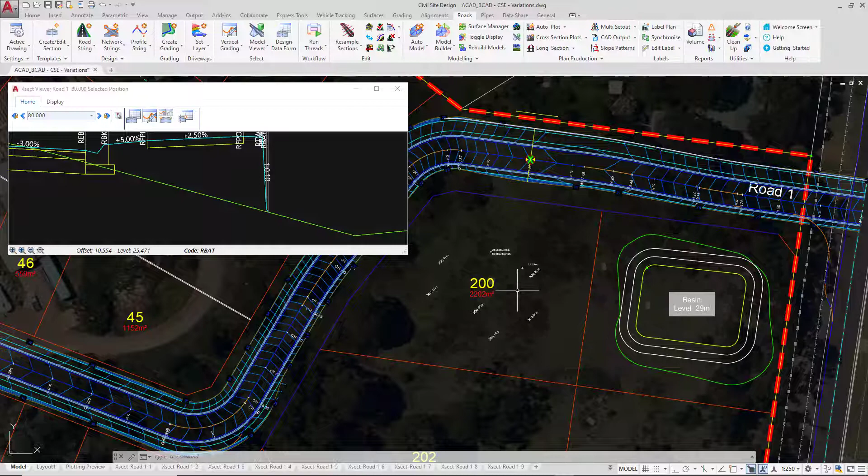Our next variation is going to allow us to use the power of an alignment to position a code. We're going to zoom in to the second corner, second bend of road 1, which includes chainage 190. We're going to get our cross-section window showing chainage 190. And we're just going to zoom out a little bit, just using the mouse, so we can see the content of the cross-section window.

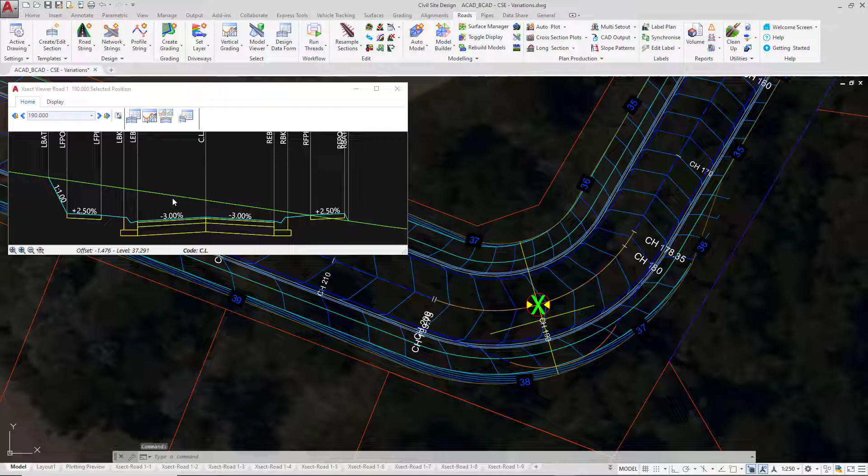You may be able to see there is an alignment which we have pre-drawn for you to indicate where the left edge of bitumen should be positioned within the drawing. To have the software use this particular alignment, we have to go and create a variation. In the cross-section window, it would be helpful to see this alignment. Now, this is a procedure which you should try and undertake as often as possible to graphically display an alignment within this window. We're going to go to the Display tab. In there, we're going to go to the following button, which is Show Other Objects.

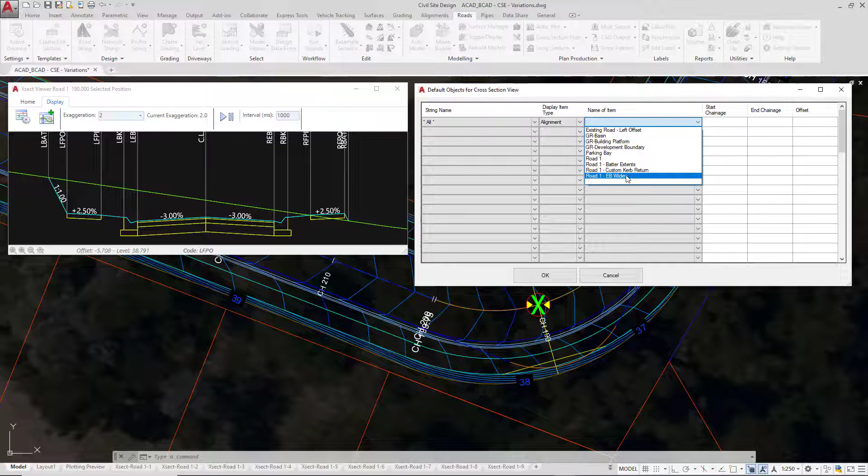In the following form, on the string name pull down, always pick all. You do not need to go and find your particular string. Always pick all. The display item type will be an alignment. The name of the item will be Road 1 EB Widen. The Civil 3D users will have a Civil 3D alignment in that current position, whereas we're currently looking at a Civil Site Design alignment. Either will be shown within this list. We're going to say from 0 to 1000. If the alignment does not exist in those particular chainage ranges, then it won't show it. Click OK.

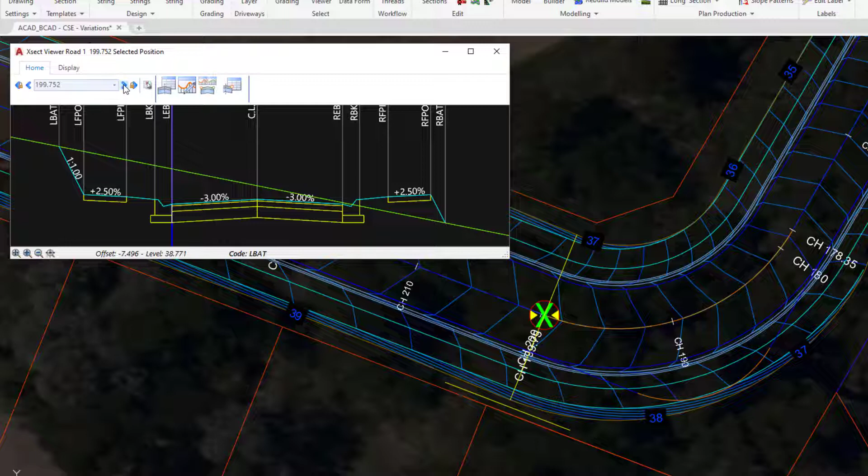You can see at chainage 190 now we have a blue line in the cross-section window indicating where that alignment is. If I go to the Home tab and scroll back through the cross-sections and forward through the cross-sections, you can see the alignment position changing. We're going to set the cross-section window to chainage 190, and then we're going to hover over the LEB code, right-click, add variation, and this time we're going to change something. So we're going to modify, and we're going to use the Match Code to Alignment option.

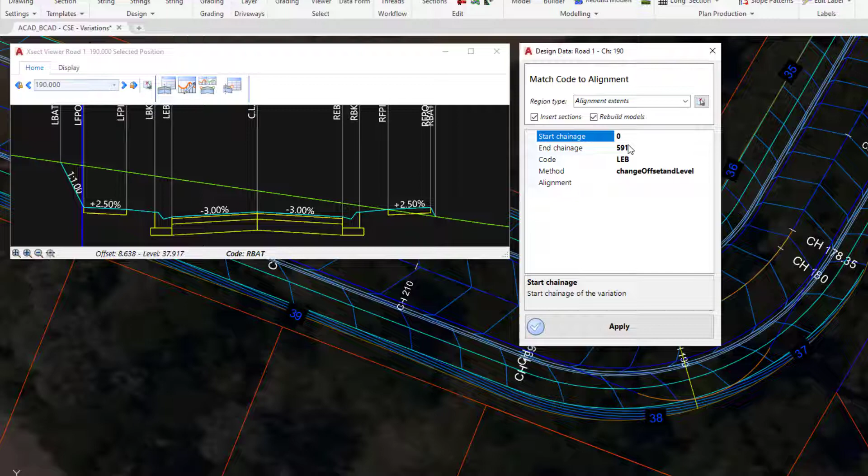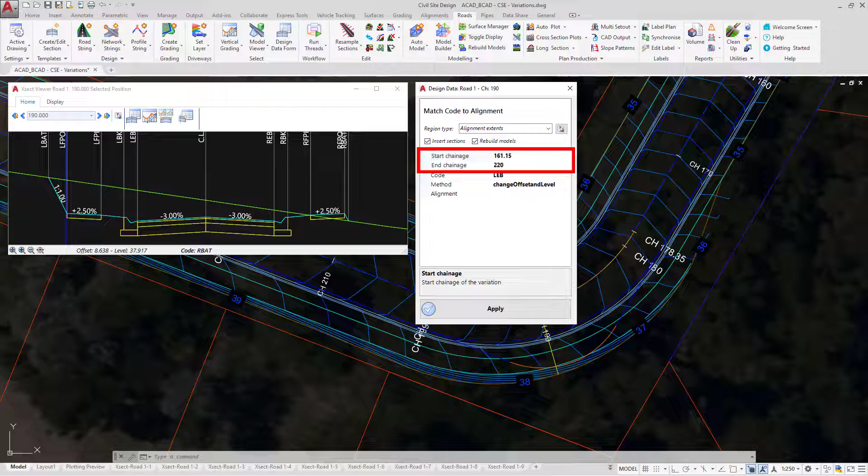In the form, we don't actually have to change the chainage range. If the alignment does not exist past chainage, let's say 210, then the software has got nothing to match onto, therefore nothing will happen to that code. So we can leave the chainage range as it is. If you're using Civil 3D, however, and you're planning to use our conversion tool and convert this string into a Civil 3D corridor, you will need to use the little picker tool shown on the form here, and then go and click the Start and End extents of where the alignment exists on the drawing. Either that, or you can type the chainage ranges shown on screen, but this is only if you're looking to export this as a corridor at some point.

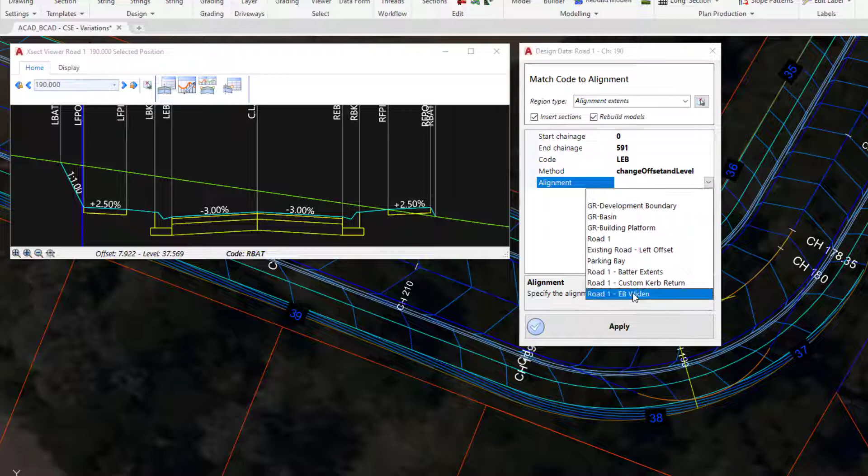We're changing the left edge of bitumen, and we're using a method called Change, Offset and Level. And very shortly we're going to see the difference between that and Change, Offset and Keep Level. What's going to happen is we're going to take the 3% and it's going to be projected until it strikes the position of the alignment. The alignment we're picking is our Road 1 EB Widen. Now we click Apply. You can see there the line work has been changed on screen, the model has also been updated, and the cross-section clearly shows, as we scroll back and forth through the particular chainages, that that code is matching onto the alignment as it should. Let's just have a quick look at the other option we had within that design variation.

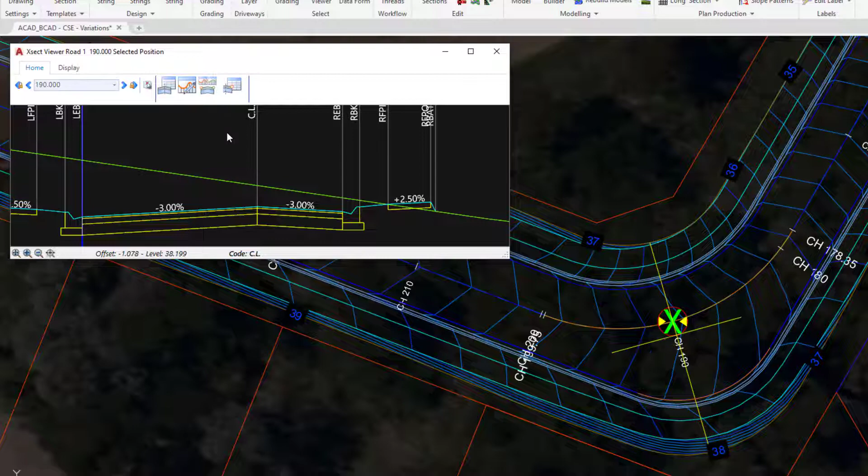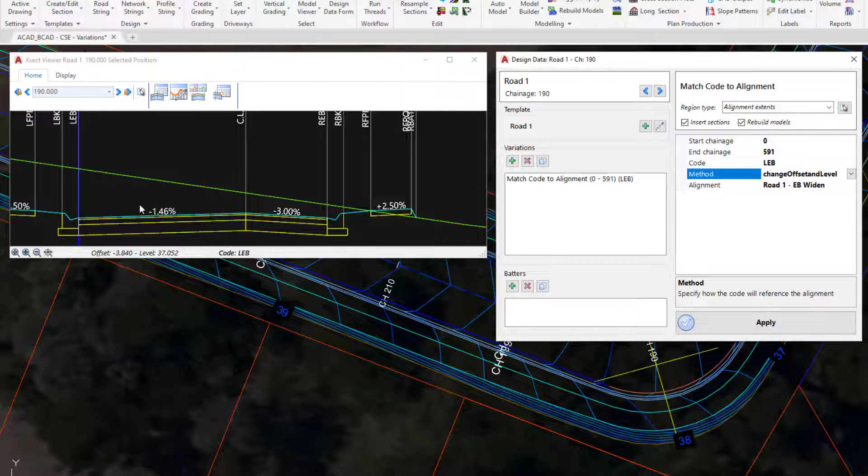So I'm going to access the variation by right-clicking anywhere in the cross-section window, clicking on Open Section Design Data. There is our design variation, and there we have Change, Offset and Level. So I'm going to click on the pull down and click on Change, Offset and Keep Level, and then click Apply. You'll see in the cross-section window that the slope has changed. What's happened is that the software has kept the original left edge of bitumen level in its original position and simply projected it across. When we use Change, Offset and Level, it maintains the slope of 3% and pushes that slope all the way through to the alignment. If we click on Apply, you can see that. Let's close down the section data form, then have a look at Model Viewer to see the design change.